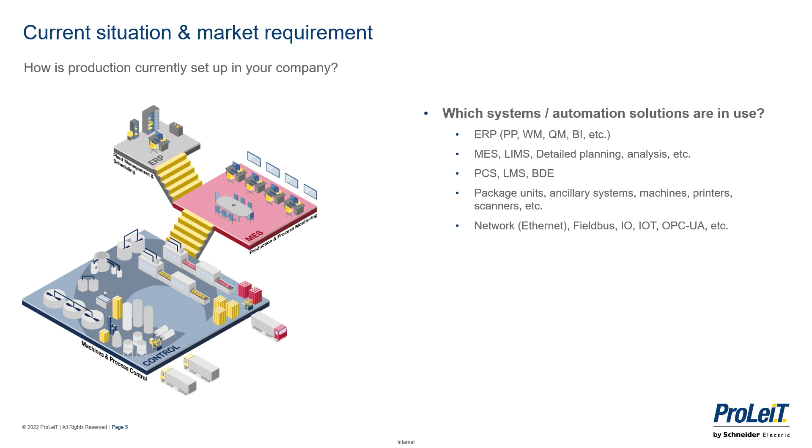So let's start now with the lecture itself. First of all, visualize your plant with your inner eye. I'm not sure who is a plant manager in this lecture, but please review a little bit your plant and your current situation. I brought this automation pyramid, and with it you see three important layers. At the top you have the ERP layer. Then the MES layer with LIMS, planning solutions and analysis, and last but not least, the shop floor control level, where the PCS, line management, data acquisition, and all the machinery is located. Everything is connected via field bus networks and different net solutions.

Some of these solutions are also in place in your plant, but as I understood from a lot of our customers, these are not yet linked to each other. They are sometimes still islands. But let's follow this idea and try to visualize the expectations you are facing from the market when you think about your production plant. You should expect more flexibility in the production itself, because the products are changing more. Sometimes you have seasonal products and smaller products, all changing a lot and more focused on the demands of the end customer.

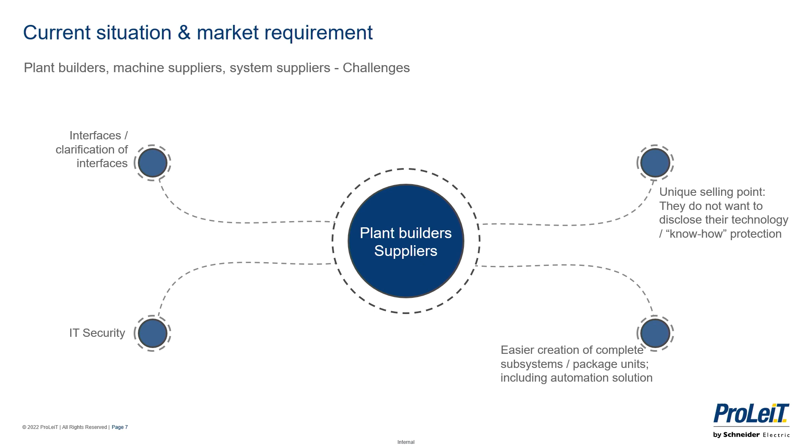So another thing is that they want to build more standardized package units, which includes not only the hardware, but also the automation. All these units should be, from the perspective of IT security, safe and tested. And the interfaces between their solution, their package unit, other package units, and later on the higher automation level should also be on a safe and standardized level.

All these requirements at the end lead to the idea of modular automation. What does this mean? Modular automation means you have more structure in your plant, you have modules in it, and you can only achieve this via standardization. Let's come back to your inner eye. What does this mean for your plant? Is it already standardized? What is the level of standardization in your plant?

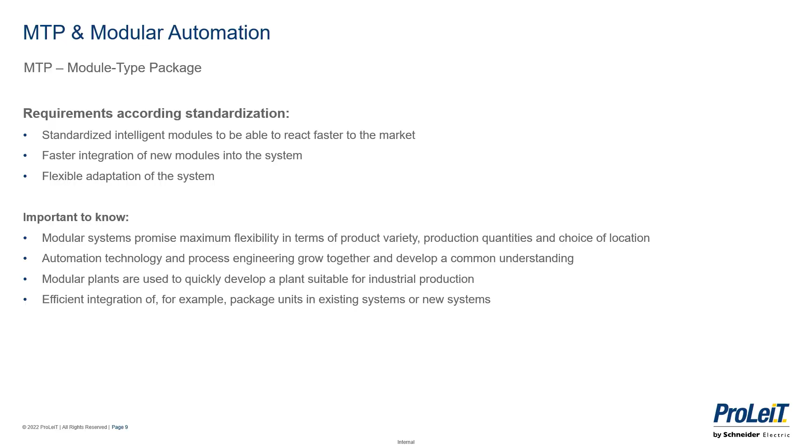Here I have listed some requirements regarding standardization. Standardization of intelligent modules may be able to react faster to the market. It's what I said. If it's more standardized, then you can change your products much faster because you can click on a module or click off a module, so you are much faster to react, for example, to seasonal products. Also, it's much easier to include new modules into the system. And also, your system is then much more flexible.

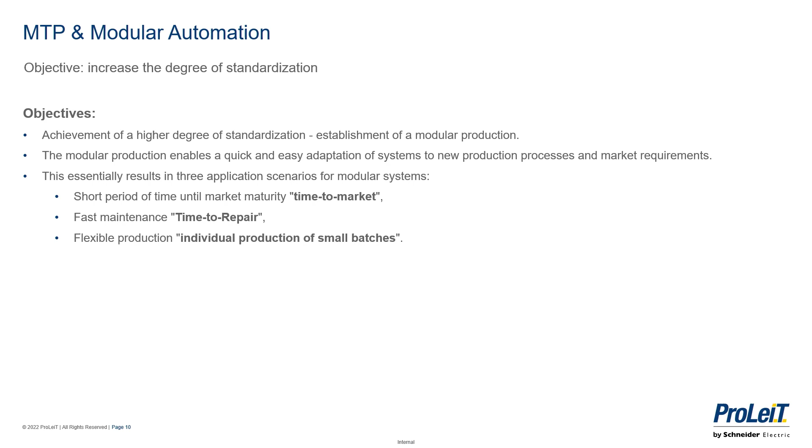And all this standardization information also gives some other objectives. So achieving a higher degree of standardization is definitely necessary to establish a modular production. As I already stated, such a modular production enables a quick and easy adaptation of a system to new processes and market requirements. And this means with standardization and modularization, you are much faster with your solution to the market.

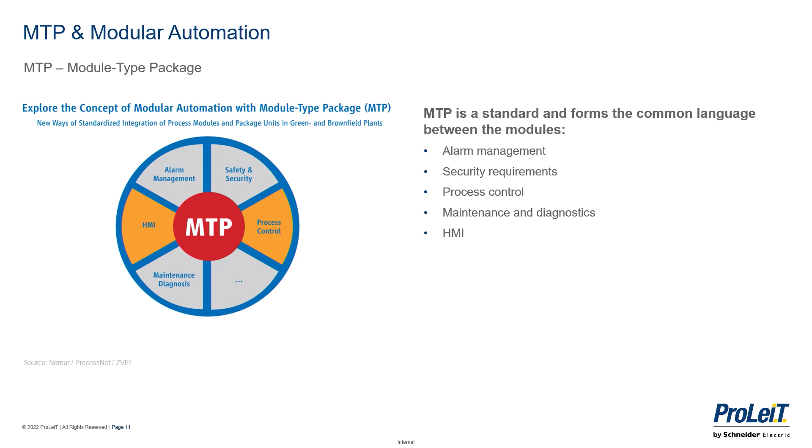And I think it's a really innovative idea, because this module or package consists of everything necessary: the process, alarm management, security requirements, process control. All these things are covered in one module with its own brain, with its own PLC, and can be used. Here I have another slide for this. You see it on the left-hand side. You have the module itself. The module has all the knowledge or needs from the automation perspective covered in the module itself.

Then the process is covered, this unit process. It could be a reaction, filtration. It could also be a mixing plant. And that's covered with their own brain. And on the other hand, you have standardized interfaces. Over these standardized interfaces, you can click or link these modules to each other. And what's very important is you also need a brain, and that's what I will talk about later on. That's the orchestration layer. And this orchestration layer manages all these modules with each other.

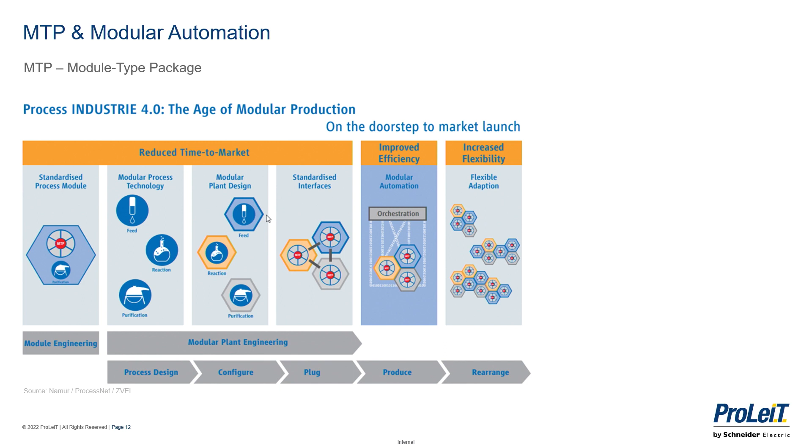The higher level of the orchestration knows the recipes, the orders, and how the product should look, and also knows the modules which are in place and manages them from a higher level, and can also communicate to other partner systems. And if you have these module types in place, then you can mix them and link them very easily together. If you are expecting a new product or another process, then you can change them easily, because the interface to the orchestration layer is also standardized, and then they can be exchanged.

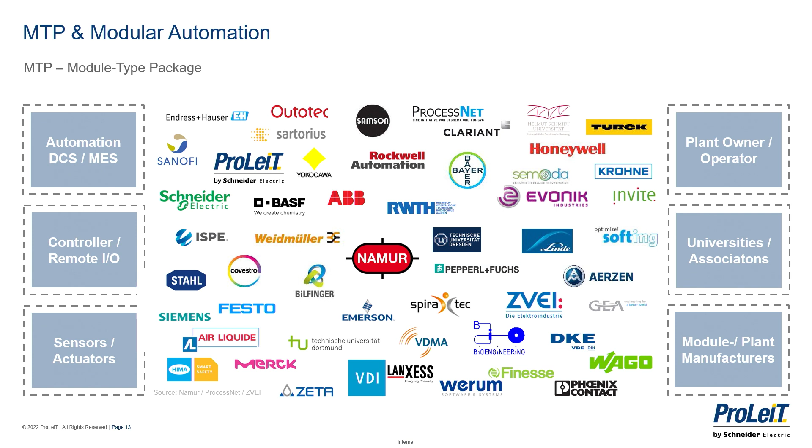So who is working on this idea? It's coming from the sensor and controller suppliers, automation, plant owners, universities, and plant manufacturers. All these are following this new idea of module-type packages. I have here a list of parts of the team, and you can see in the middle it's NAMUR. This association tries to organize these ideas, define the standards for the interfaces, for the communication, and how this module-type idea should look.

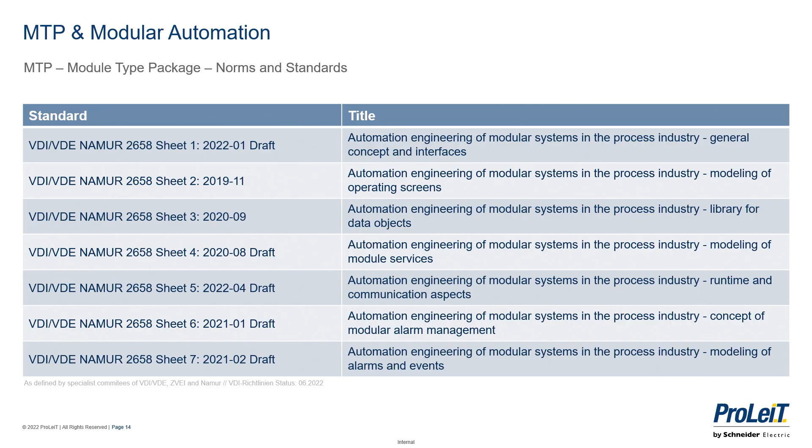I brought with me some slides regarding NAMUR, where you can see that they already started with this idea. It's not just in the mind of some students, it's already in place. There are also some prototypes in place. I know them from some hardware suppliers, and we from ProLeiT are also working on it.

So I think I already explained this, that it's very important not only to have these standard modules, package units in place, it's also important to have overall a layer who communicates and organizes these modules. And for this, it's the process orchestration layer. So it's like an orchestra.

You have different players, modules in place in your plant, but there is a higher level above who knows, who gives the information in which steps the product has to be produced. It gives the information how the product should look like, and also gives the information which modules will be coming after another. So this means with a batch orchestration layer, you can be your own conductor in this orchestration layer of your plant.

So, and where is this orchestration layer located? The brain, I would call it. It's in the automation pyramid. It's in between the field level and the ERP level. It's not on the basic automation layer. The basic automation layer is coming with the modules itself. It will be done by the supplier of the hardware. It's a level above where this information is linked together.

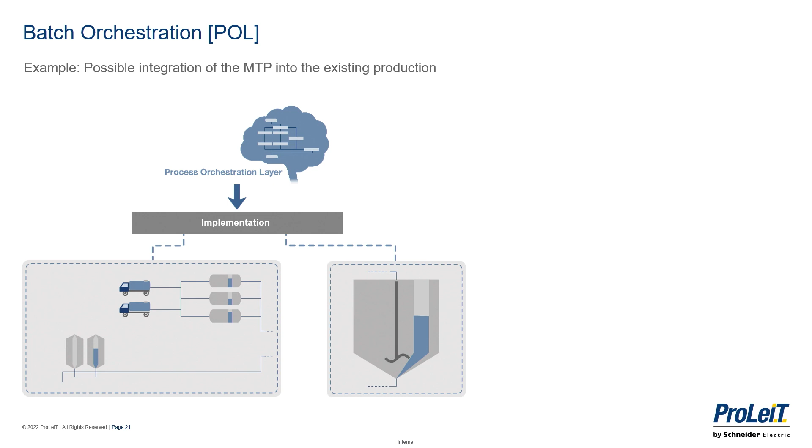And the first thing what you have to do, because the basic automation is already there, the first step is to implement this batch orchestration layer to the main sub-processes. That means the raw material tank and the filling tanks and the mixing area. And what's also important, you should know also the modules, the equipment. The equipment itself is also an MTP module. And these modules also have their basic automation in place.

And as I stated before, in a brownfield, they are already linked to each other, but the orchestration layer above manages this based on standard interfaces. He communicates with these different modules and manages them in the right way.

I will come now to the Plant iT Batch Orchestration System. This system was developed from ProLeiT, and it follows totally this idea of modularization and communicating with these kinds of modules. First of all, we have standard interfaces to some PLC suppliers, for Modicon by Schneider, Simatic by Siemens, and Rockwell with ControlLogix. These standard interfaces are already in place.

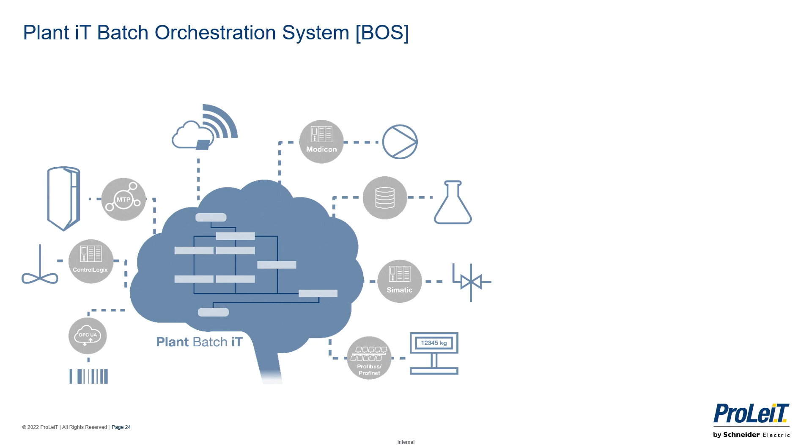So I show you now also an example, a sketch for it. You have there a scanning. It's only a rough process with scanning, mixing, bringing this mixing to a tank, then dosing something manually into it, and later on you have a tank farm, a pasteurizer, and at the end the product has to be checked via a laboratory system.

And as you can see from the symbols, the scanner is connected via a PLC, via a standard interface. The mixing unit is an MTP unit, and the tank is connected via PLC standards. The weighing scale via Profinet, MTP for the tank farm, PLC for the pasteurizer, and the database interface for the testing. And that's now the idea of modularization.

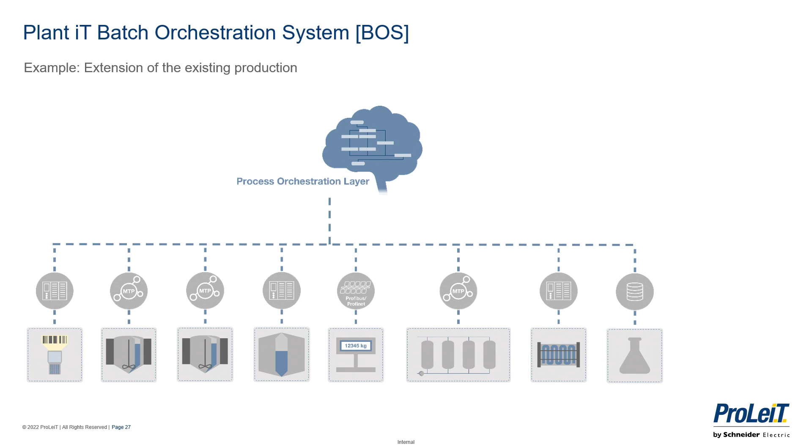Because you have standardized this tank, you can add an additional one. Or you see in your plant the tank is too small, then you can add a bigger one, even exchange them. Or now you want to bring in the manual material with the scale a little bit earlier, and later on you will have the scanning, then you can exchange them.

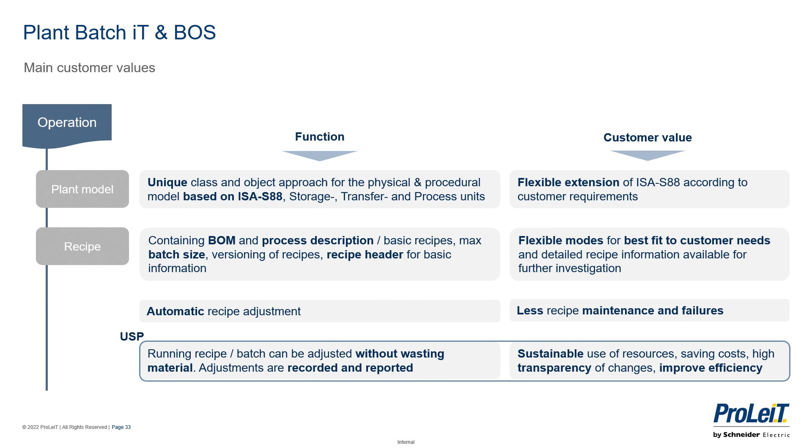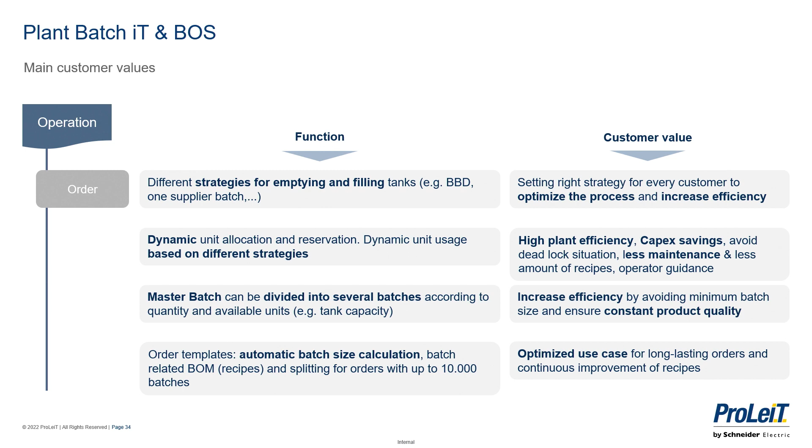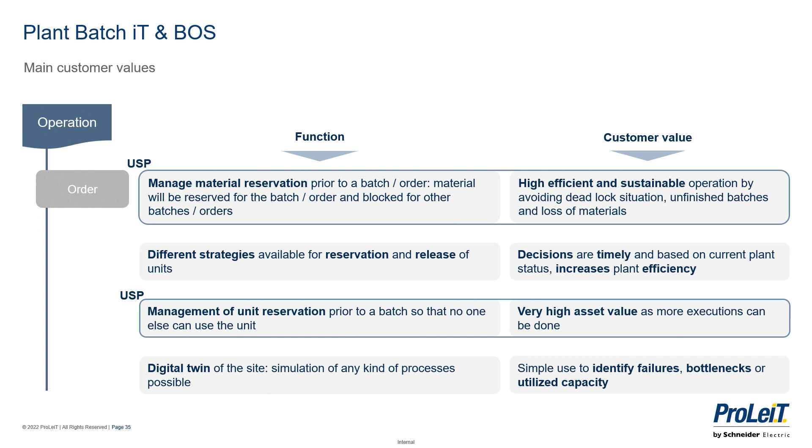Master batches can be divided according to the available units, and the batch size can be calculated automatically. And on the last slide, we not only manage the recipes, but also the material, with different strategies for reservation and releasing units and materials. And also, we can build with this idea of batch orchestration a digital twin of such a plant on this orchestration layer.